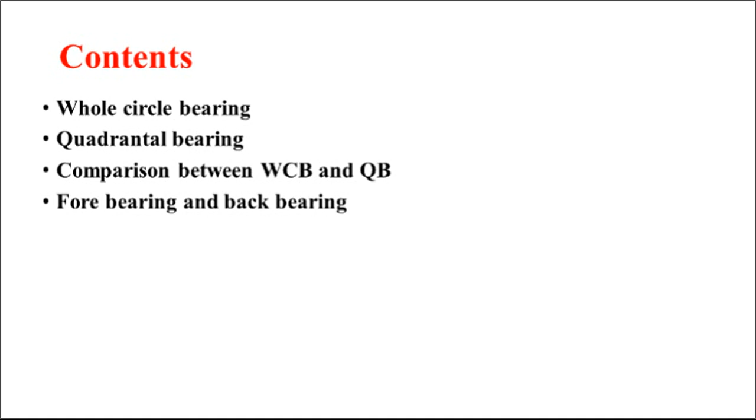So, first of all, whole circle bearing and quadrantal bearing, also called reduced bearing, are two different types of bearing measurements used in compass surveying. We will see this in detail. First, whole circle bearing. The horizontal angle made by a survey line with the magnetic north in clockwise direction is known as the whole circle bearing of a survey line. Only the magnetic north line is considered as a reference line in the whole circle bearing system.

Second one, quadrantal bearing or reduced bearing. The horizontal angle made by the survey line with the magnetic north or south, whichever is closer to the line, in the eastward or westward direction, is the quadrantal bearing, also called the reduced bearing of a survey line. Both magnetic north and magnetic south are considered as reference lines in the quadrantal bearing system. Next one,

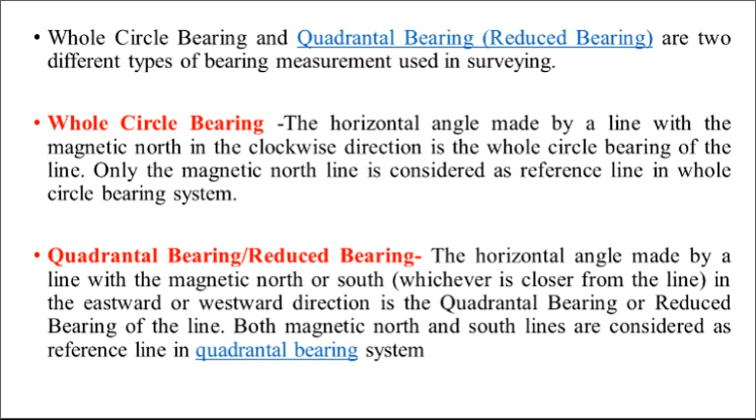whole circle bearing and quadrantal bearing are shown in this figure. First, this is the north direction and the line is like this. The bearing is measured in clockwise direction up to that line, and this is called the whole circle bearing. In the other figure, the line is like this; because this line is nearer to the south, the bearing is measured with respect to south like this. This is called the quadrantal bearing or reduced bearing of this line.

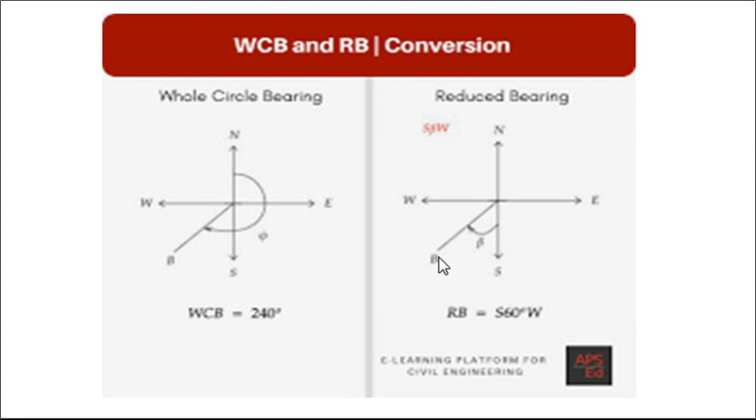Next one. In this figure, the lines are in different quadrants, and for those lines the whole circle bearings are shown. The first important thing in compass surveying is that we consider the quadrants like this: NE is the first quadrant, SE is the second quadrant, SW is the third quadrant, and NW is the fourth quadrant. So, we count the quadrants in clockwise direction, first, second, third and fourth.

Now, see here, line AB falls in the first quadrant, so this angle is the whole circle bearing of line AB. Next, line AC falls in the second quadrant, and this is the bearing of line AC. Line AD is in the third quadrant, so this total bearing theta 3 is the whole circle bearing of line AD, while line AF is in the fourth quadrant. So, this total angle, theta 4, is the whole circle bearing of line AF. Next,

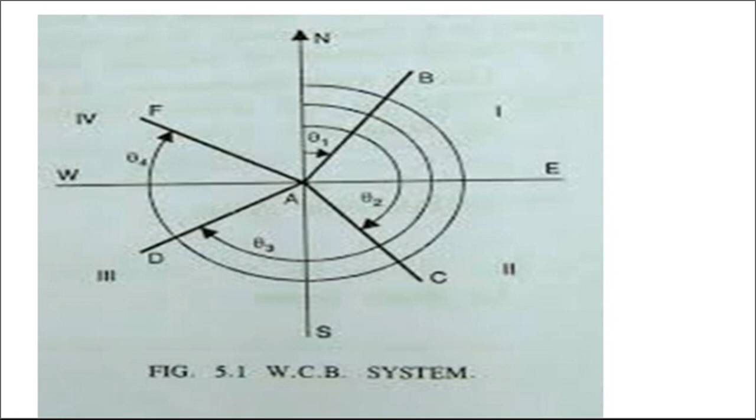quadrantal bearing system. In this figure again lines OA, OB, OC, OD are shown, with the angles made by these lines with respect to north and south. First, line OA, the angle given is 60 degrees. So the quadrantal bearing is written as N 60 degree E, meaning we have to write the quadrants also in reduced or quadrantal bearing. For the first quadrant, the reduced bearing and whole circle bearing are one and the same; we only add the quadrants.

Now, this is the second quadrant, line OB. The quadrantal bearing for OB is S 40 degree E, because this bearing is measured from south towards the line. Next line is OC. For OC, the nearer pole is south, therefore the quadrantal bearing of OC is S 30 degree W. And for the last line OD, north is nearer, hence the quadrantal bearing of OD is N 40 degree W. Next one,

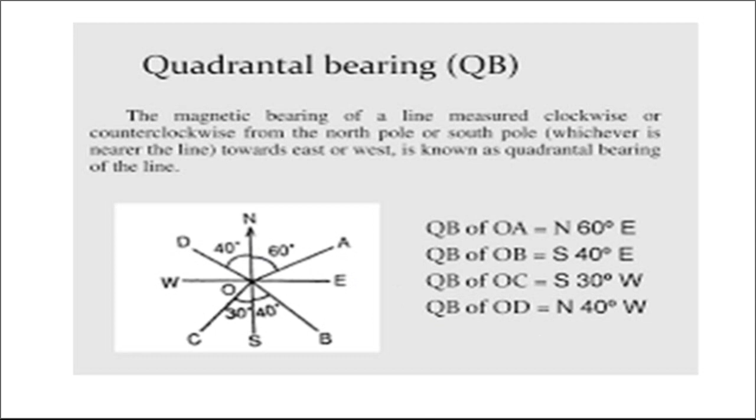comparison between whole circle bearing and quadrantal bearing. First, the horizontal angle made by a survey line with magnetic north in clockwise direction is known as the whole circle bearing.

Quadrantal bearing: the horizontal angle made by a survey line with magnetic north or south, whichever is closer to the line, in eastward or westward direction, is known as quadrantal bearing or reduced bearing of a survey line. Second, the clockwise angle from the reference line is only taken in case of whole circle, while in case of quadrantal both clockwise and anti-clockwise angles from the reference line are taken, maybe north side or maybe south side.

Next, the value of whole circle bearing varies between 0 to 360, while the value of reduced bearing varies from 0 to 90 degrees. And the last one is examples of whole circle bearing, that is 26 degrees, 121 degrees, 245 degrees and 350 degrees, while the quadrantal bearings are N26E, S59E, S65W and N10W. So, quadrantal bearings are written like this, while the whole circle bearings are written like this.

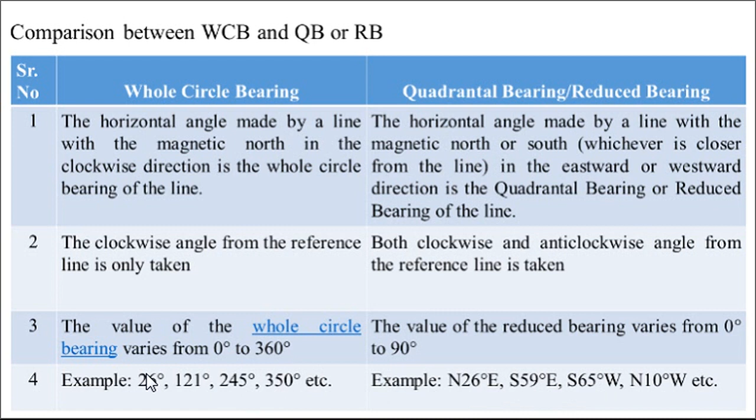Next one, conversion of bearings from one system to another system, that is whole circle bearing to quadrantal bearing. So, this is the table in which the formulae for conversion are given. In case of the first quadrant, the whole circle bearing varies from 0 to 90, and the rule for converting to RB is the same as the whole circle bearing, and the quadrant is first. In case of the second quadrant, whole circle bearing varies from 90 to 180 degrees, and the reduced bearing RB is equal to 180 minus whole circle bearing, and the quadrant is second.

Third case, WCB between 180 degrees and 270 degrees, then the reduced bearing RB is equal to whole circle bearing minus 180 degrees, and the quadrant is third, SW. And the last, fourth case, when the whole circle bearing is between 270 and 360 degrees, the rule for conversion is RB equals 360 degrees minus whole circle bearing, and the quadrant is fourth. So, by using this table we can convert whole circle bearing to quadrantal bearing or quadrantal bearing to whole circle bearing.

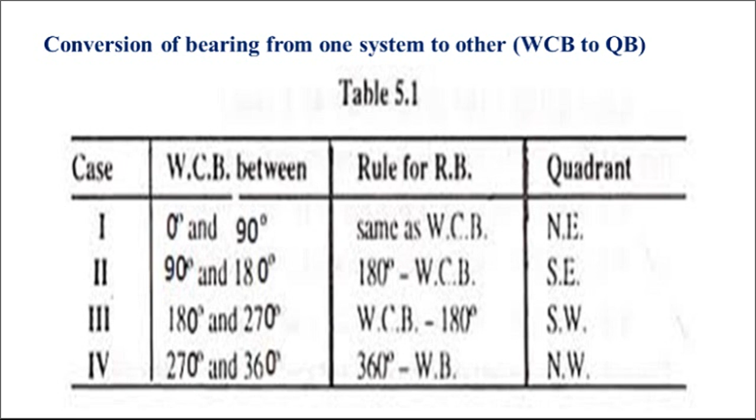Next one, forebearing and back bearing of a survey line. First, when the bearing of a survey line is measured in the direction of progress of the survey line, it is called the forebearing of that line, while when the bearing of a survey line is measured in the direction opposite to the progress of the survey line, it is called the back bearing of the survey line.

Now, see in this figure, line AB is given. At A this is the north direction, at B this is the north direction. When the instrument is at A and after temporary adjustment we sight the point B, we will get a certain angle. That angle or bearing is known as the forebearing of line AB. As it is measured in the forward direction, this alpha is known as the forebearing of line AB.

Next, if we shift the instrument or prismatic compass to station B, and after leveling, sight the object at A and measure the bearing, then this angle is known as the back bearing of line AB. So this angle beta is known as the back bearing of line AB. The forebearing is measured in the progress of the line, while back bearing is measured in the reverse or backward direction, and hence back bearing of a survey line is equal to forebearing plus or minus 180 degrees. This formula is very important as far as forebearing and back bearing of different lines are concerned.

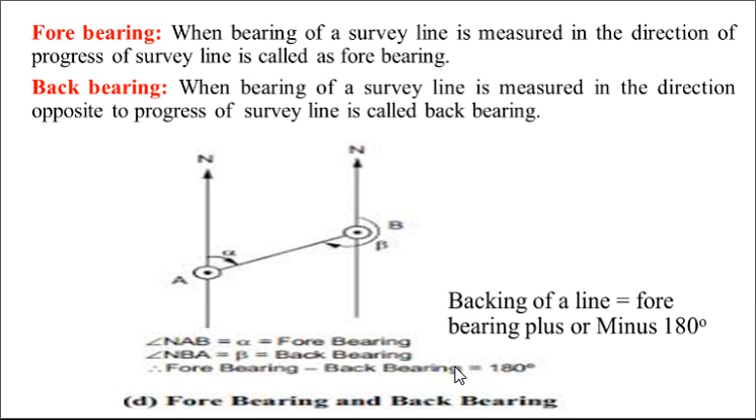Now see in this figure, angle NAB is equal to alpha, and this angle is known as the forebearing of line AB, while angle NBA is equal to beta, the back bearing of line AB, and therefore forebearing minus back bearing is equal to 180 degrees. These equations are very important as far as forebearing and back bearing of different lines are concerned. So this is sufficient in this lecture.